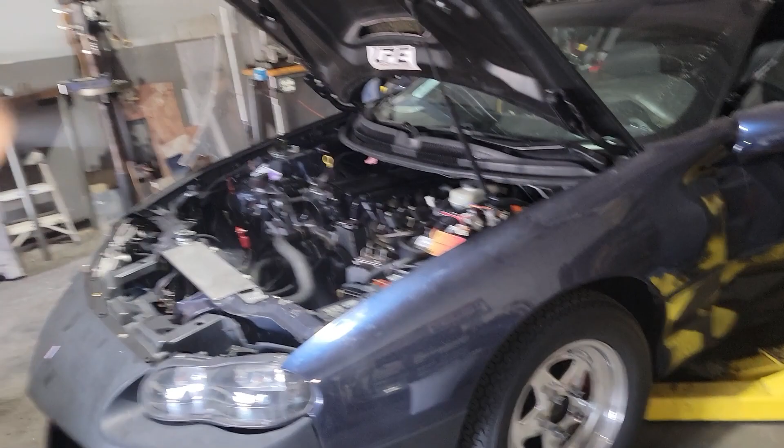Yesterday we started on Jesse's Camaro, and we got the whole heater box out. The dash vents are out. I gotta remember to cut that off.

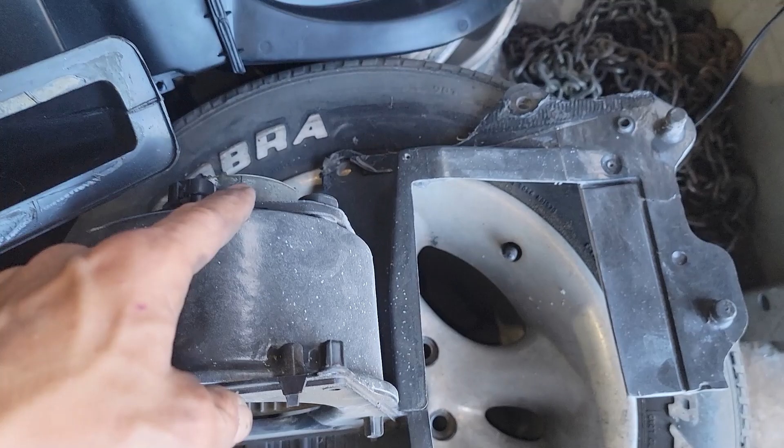So what I did today, I came in this morning, took a piece of aluminum, cut it off, then took the heater box apart - this piece here - so that I can use it as a template. A couple pieces broke, but I stuck them back together, made the template, and cut the template out of that piece of tin. You can kind of see, with a plasma cutter, kind of a rough cut.

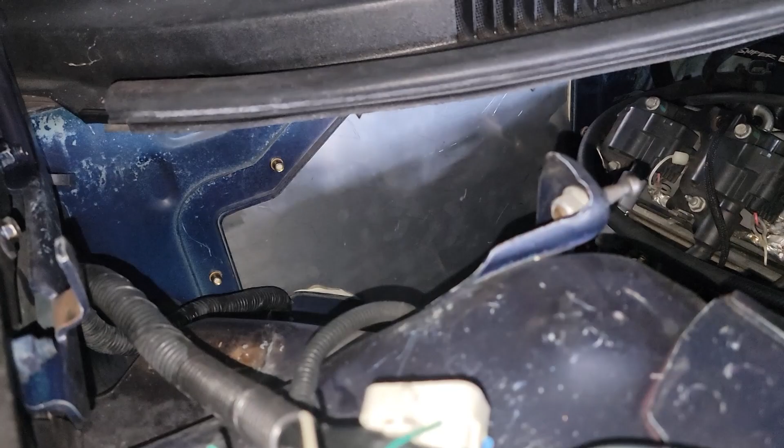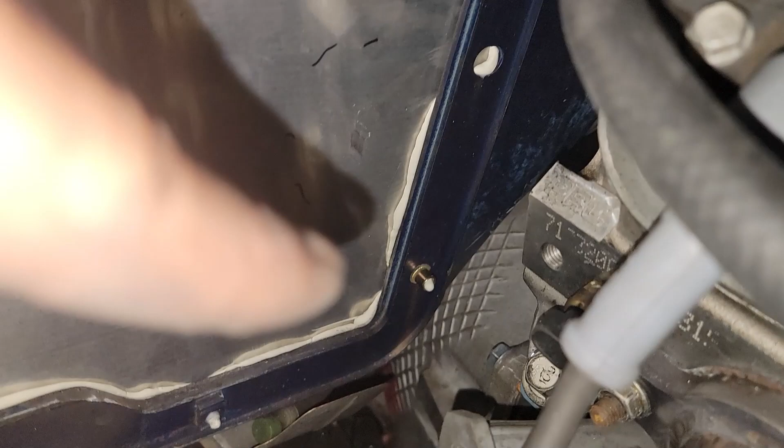Went through the firewall and did all the nutserts where the big holes were, where the bolts came from the outside of the engine bay into the box. So it was these - two up there, one over there, one down there. So all of those, I did the nutserts. The holes were friggin' perfect for the nutserts to fit.

And then the tapped holes, where the bolts came from the inside to the outside, I took a 1/4-20 tap and literally just ran it in and out. It took a few tries because it was not easy, but I got those all done.

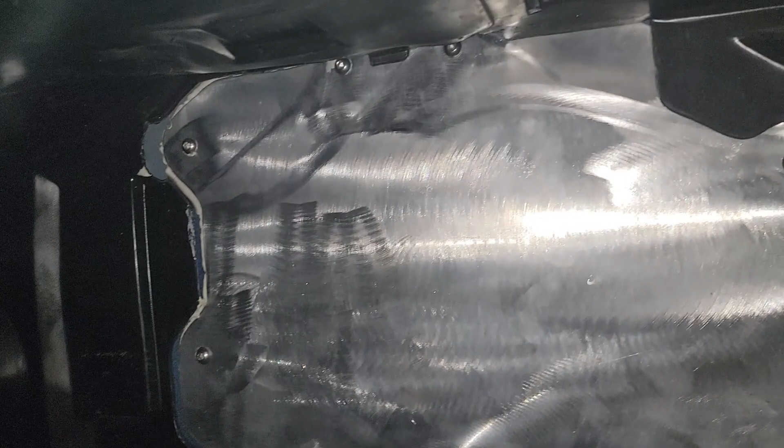Got the panel, cleaned it all up with the angle grinder, and then drilled the holes in the panel. Basically it's shaped exactly how the heater box was shaped, so it fits really good.

In and out 15 times to make sure it was right and the holes all lined up. Finally got it how I like it, and I put a bead of seam sealer on the backside of it and went ahead and screwed it all in. So it looks good. If he wants to paint it, he could paint it, or we could paint it, whatever.

So I think with that done, I believe I'm ready to start on the Terminator X. Now I have a couple different ideas that I have with it.

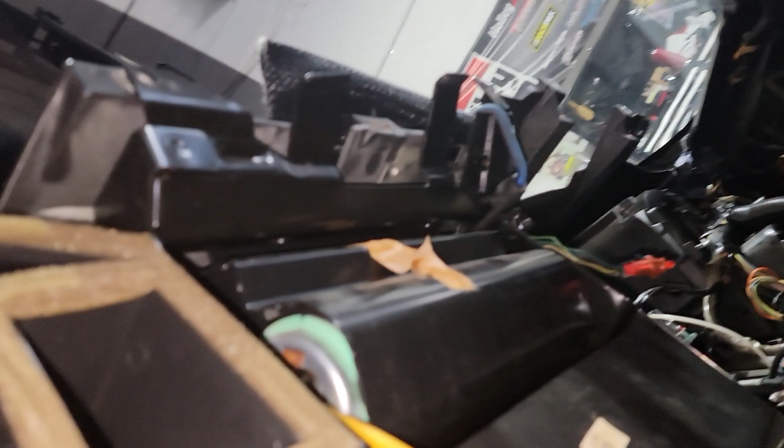Oh, I see, that's integrated into that duct. Okay, I was thinking about mounting the ECU on the back of the glove box. I just don't know, because that would probably mean I'd have to drill that hole bigger where that harness is going out to get the harness through, but I kind of have a feeling like the harness... I don't know, I guess I'm gonna have to take the harness and kind of lay it out.

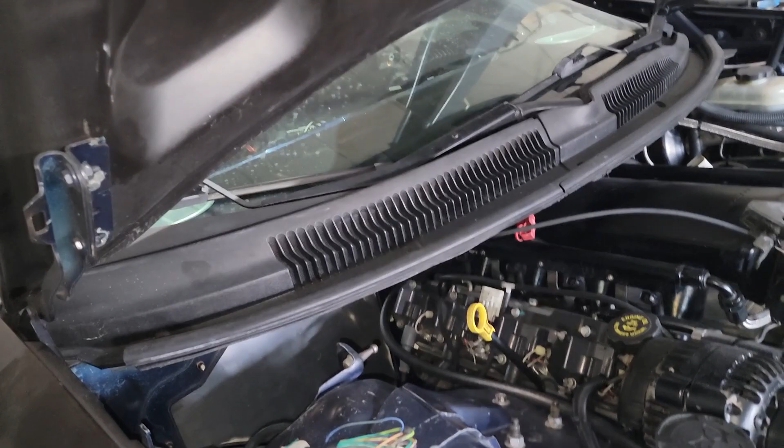But being that I'm leaving, today is my last day in the shop. We leave tomorrow morning, early in the morning. That's about as far as I'm gonna go on his car. I don't want to start doing a bunch of stuff and then forget where I left off.

I kind of want to have an easy day today. So I think what I'm gonna do is Sean's Mustang. I am going to start measuring.

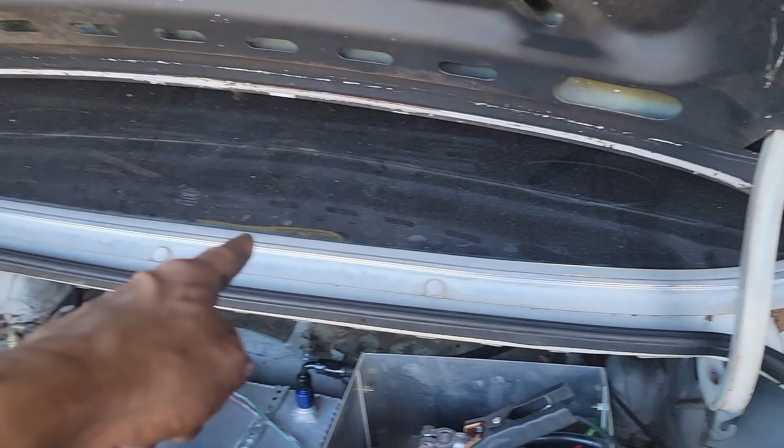So this is roll cage, mini tub, which with the mini tub, Jeff, I cut out the entire trunk floor, and then I put back in tin for the floor.

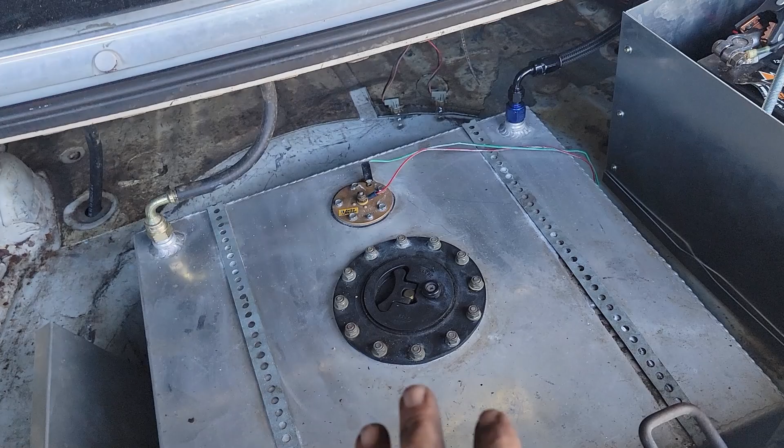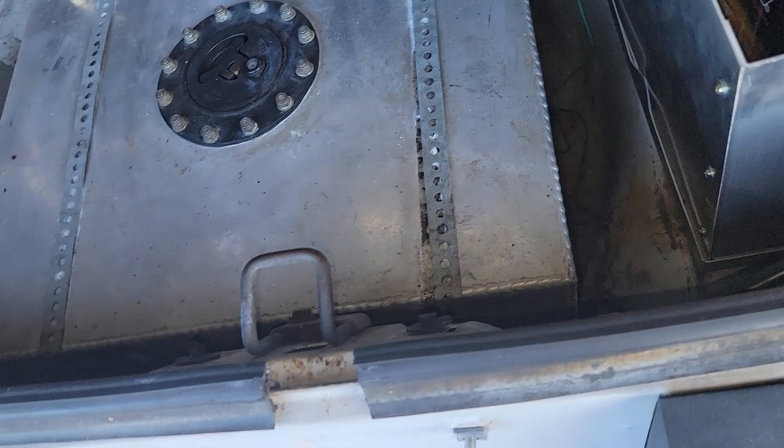On this car, I believe what I'm gonna do is kind of a lot like what we did with Chris's Capri. He doesn't have a notched - we call them notchback - but his is a hatch. So we sunk his tank down through the floor and then built the floor around his tank. I think that's probably what I'm going to end up doing, because this tank is most likely way too tall to fit in here. It'll definitely be centered more.

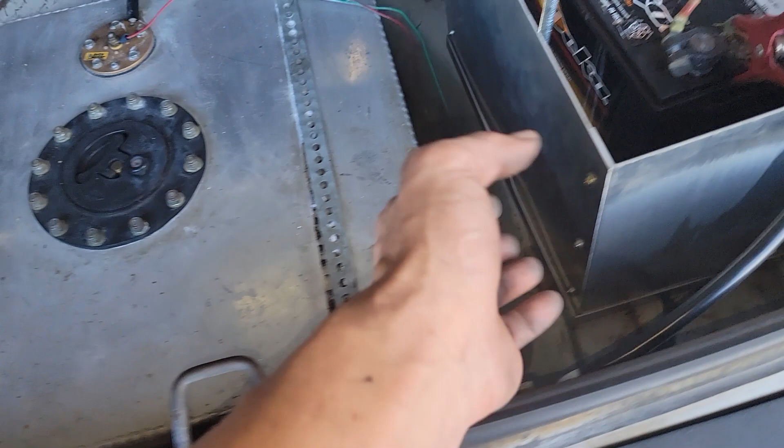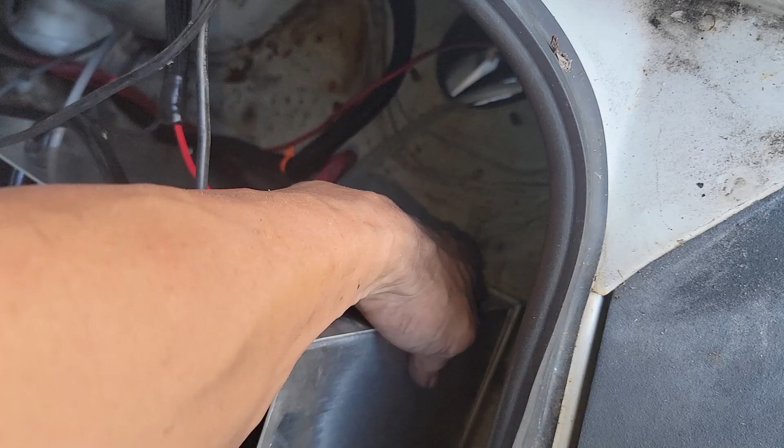And then... not sure. Oh, I see, it's just off a little bit. Yeah, put it right. Yep, there's something over there? No. Oh, there it goes, kind of. It must just be because it's mounted to the floor a little bit crooked.

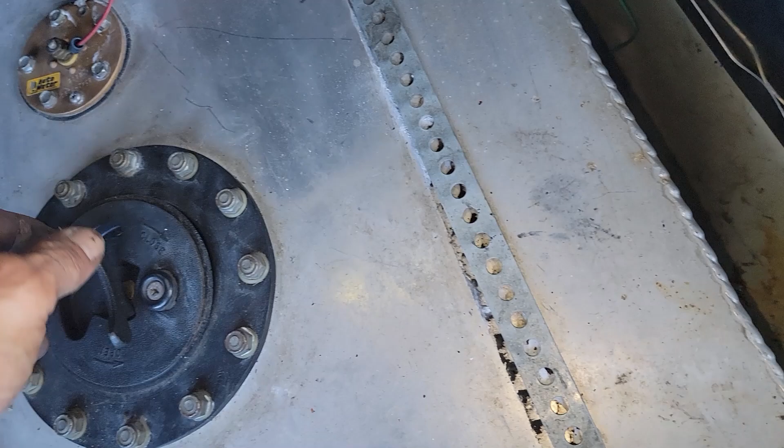So I gotta pull all this out, pull the fuel cell out. It's probably full of fuel too, isn't it? Oh boy. Oh, that's good stuff. Oh, it's not full, only half a tank. Oh, it stinks like booty hole. Yeah, so I'll have to figure that out.

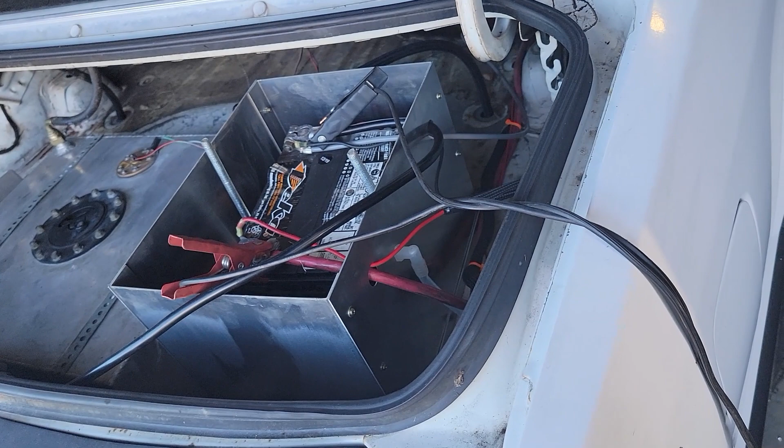I'll have to figure that out. But what I want to do for today is absolutely nothing.

No, but I'm gonna take my laptop. I have the BendTech Pro version 7X, I believe. For some reason I'm doubting everything I say today. I want to go on vacation, but let's see, let me grab it real quick.

I haven't really gotten involved in this yet. So what we can do is, see, I have roll cage templates, gives you a bunch of different style roll cages. Believe this is the one here. No, maybe it's this one.

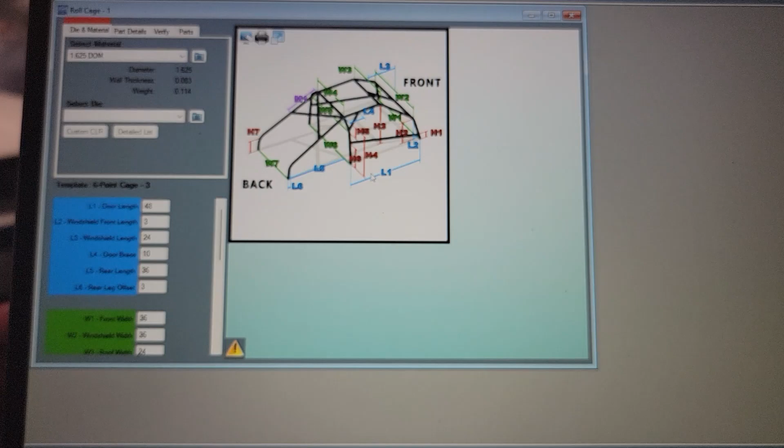Oh, sorry. No, that's not it. Alright, fucking interrupted every 5 minutes. Can't just... whatever.

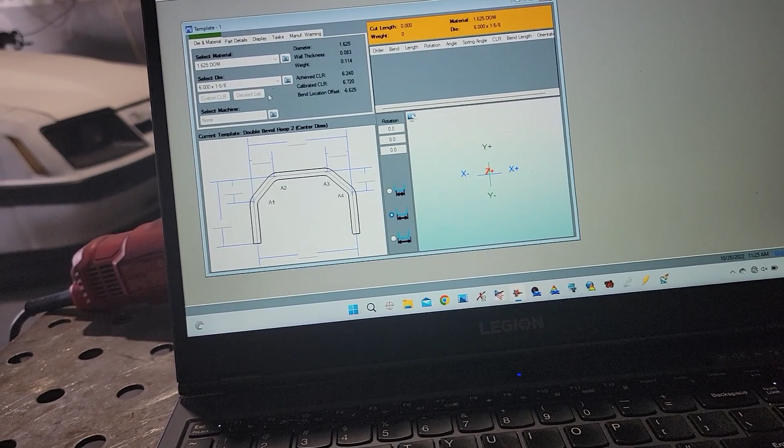So we're going to do it as an assembly, I believe. No, we have to do it as templates and then assemble it, or draw it from scratch. Like I said, I haven't really used this much.

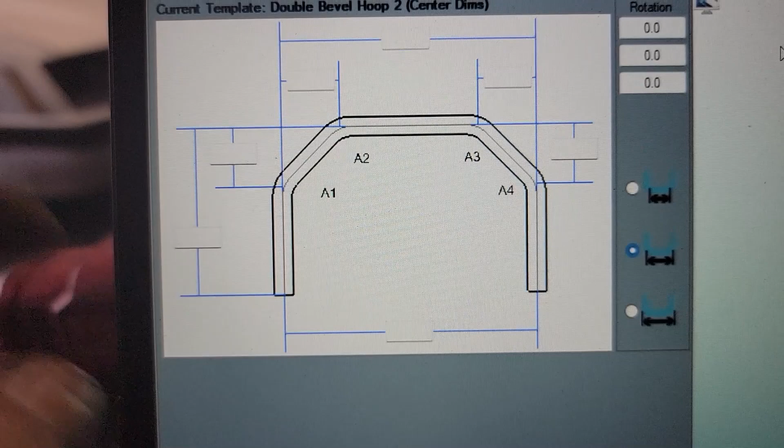So basically what you do is pick the bar and then put in your measurements, and it should tilt the bar in if you want it, because of how the body line is on the car. If you go straight down, the bar has to be moved in, harder to keep the bar tucked toward that back door jamb, if that's what you want to call it. So it'll actually sit away from that at the bottom, and then the bar will come down, there'll be a big gap between the body.

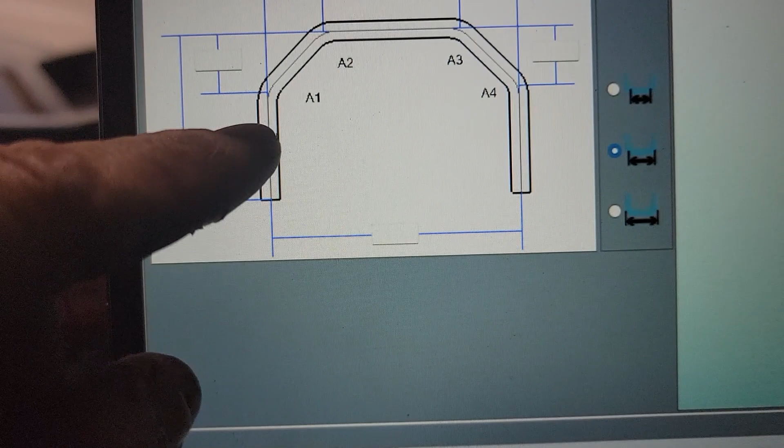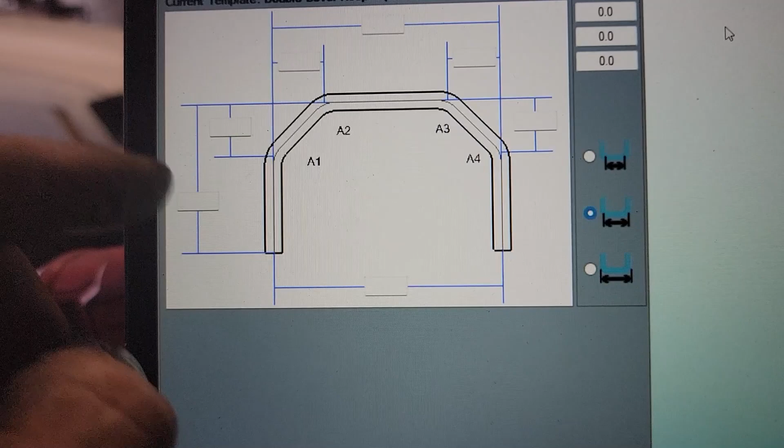So what I want to try to do is get this angle, instead of being a 45 and a 45, I want to make this angle more like maybe a 60 or something like that. So I have to measure this width, this width, this width, do all these heights and widths and see where I'm at, if this will tilt the bar in or not.

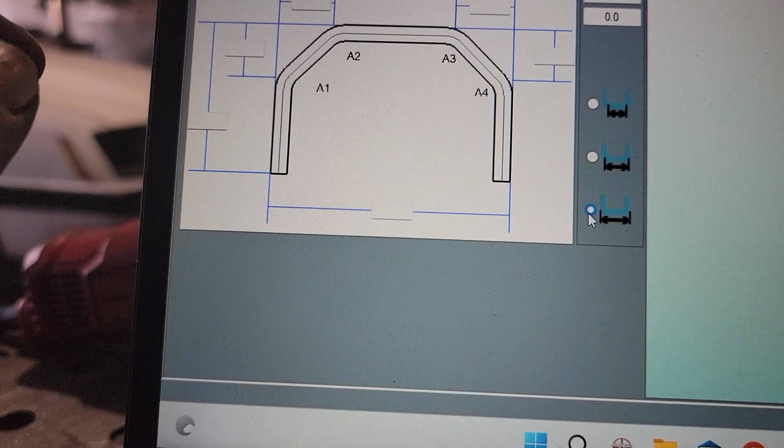It also lets you choose: do you want the inside of the bar, center to center, or the outside of the bar. I tend to measure outside to outside, seems to work a little easier because I don't have to do math or anything. So I'm gonna start measuring, see if I can put this in, and if this bar tweaks. If the bar doesn't tweak, then I'm kind of screwed, I'll just have to draw it from scratch. So I'm gonna get started.

All right, I am not one to give up, but the only way to describe it is what the fuck, because you put all the numbers into this software and it gives you your main hoop. It tells you where to put the shit, it tells you what angle to bend it. All this gravy, hoopla doopla, yay yay. And that's the first bar right there.

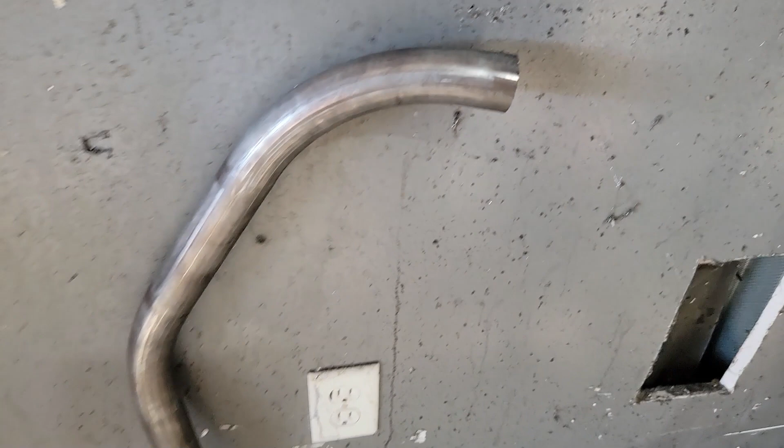So that would be the upright, the bend, and then that would be the roof bar. And it actually was sitting like this, so the angle's way, way off. Not only that, the thing is too short. But if I hold that angle pretty good, you can see the damn thing's pointing down, whereas it needs to be more like this. Having it kicked in like that is stupid.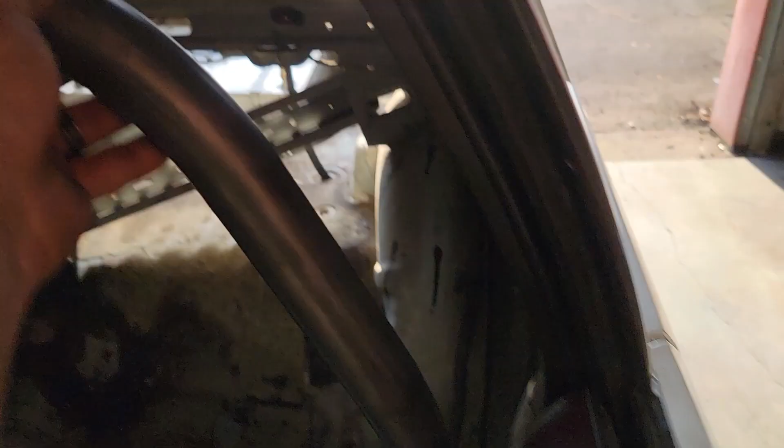But that angle's right because it would sit like something like that, so it points straight, that angle's right. That angle's too much, but it's too short. Like, what the hell? And if we go down through the floor like I want to, the dude better cut himself off at the waist. So cool, that's a waste.

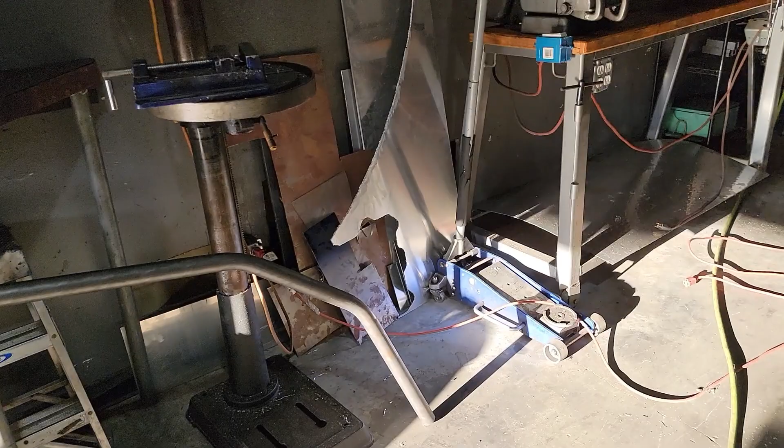Then you call, you gotta submit a support thing. They send you a patch. The patch says some kind of invalid whatever. Yep, those were the first settings. That ain't gonna work, so flip over to this side.

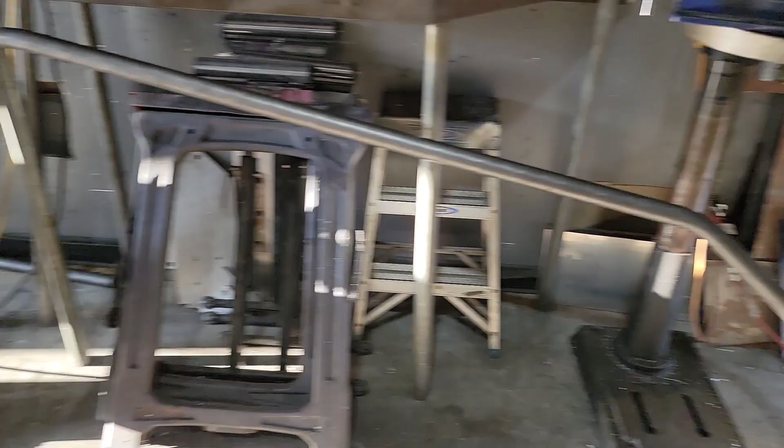Well, you're getting closer. Still wrong, still too short. So I have no idea what's going on, but I can't afford, I'll be honest, I can't afford to burn almost $1,500 in chromoly to end up with scraps that are like 10 feet tall, and then whatever that length would be, maybe 6 feet, 5 feet by the time you get done cutting it, and there's another one about 10 feet.

So the good thing is I can use this for the A-pillars, door bars, stuff like that. That's the only bright side to it. But until they figure out what's wrong with the software—because I sat and waited over 2 hours for them to email me a patch, to then sit on the phone for an hour and say the patch didn't go in or something, I don't know.

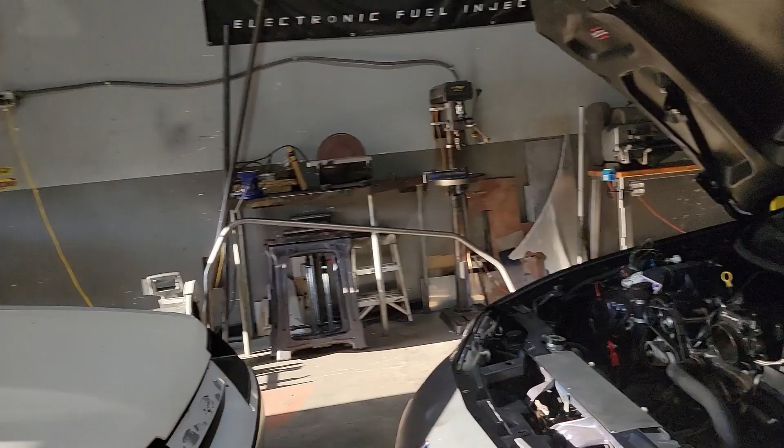You kind of expect it to work when you spend a lot of money. Honestly, with that piece of shit frame and the die, I couldn't tell you where the die is, but I bought a die. I can bend a cage, it's a little bit of work and a lot more measuring and stuff like that. But I've never wasted that much tube. I never put 6 wrong bends in tubing. I just don't understand it.

When you pay a lot of money, the bender's good, the bender works, and the bender's accurate and all that stuff, and it's doing what it's supposed to do. But when you pay a bunch of money for some software that says it's supposed to make your life so much easier, you would expect it to work, but apparently it doesn't work.

So I'm waiting for support to get back, but I'm leaving. I'm done. Because it's a bug or something, I don't know, and the thing calculated something wrong, so we changed it. Quote unquote fixed it, you're good to go. Shoved the bar in, and the first bend is like the same as the last one. Literally, it came out exactly the same as the last one.

Just as soon as you start putting the measurements on the bars, you kind of get the idea something ain't right, because your first measurement should be very close to your last measurement, other than the distance of what's called the clamping block that goes in here and pinches on the pipe, which is like 3 inches difference. But when you measure it all out and it's like 12 inches difference or 11 inches difference, you get the idea that something ain't right.

I knew it didn't seem right, and I said to the guy, no, it's not their dollar they're bending. I'm not trying to knock them or put them down, but because they're not physically here seeing what's going on and trying to work with what's going on. At the same time, it's like, dude, how many other people have this issue? But that's probably why it takes like 2 hours for them to email you back a patch.

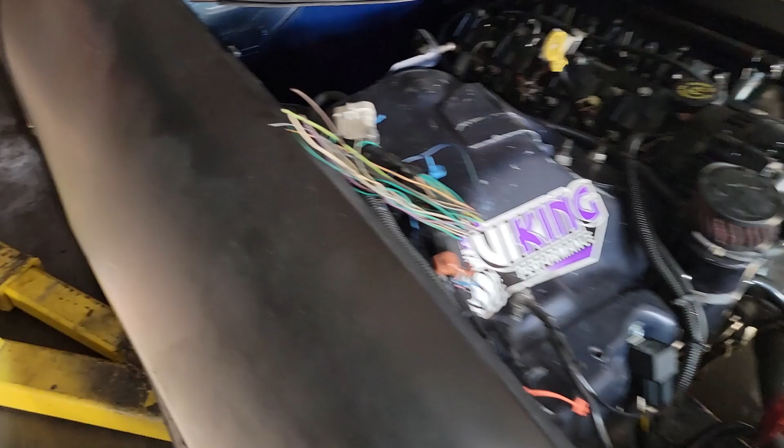It even color matched the firewall. I'm not sure if I showed that. I just painted it, I had a can of paint, so I painted it. I got the Terminator out, opened up.

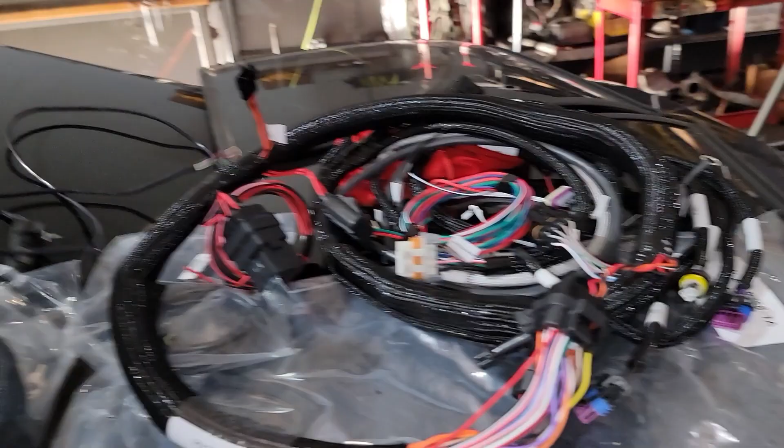We discussed a couple options we want to do with a couple of things with the USB cable to make his life a little bit simpler as far as plugging in. But I will say, Holley definitely changed their braiding.

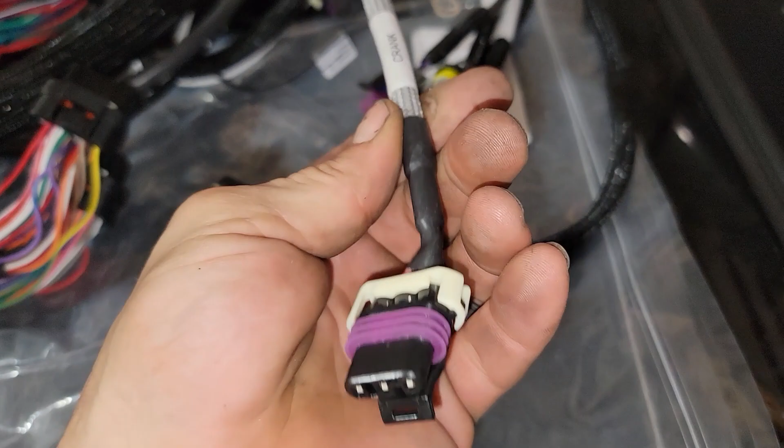It's nicer, they went to a smaller braid. It's definitely different. And then if you look at the crank sensor, that has a totally different heat shield on it, much nicer than just the foil wrapped heat shield that they were doing. It was literally like tin foil they wrapped around that wire. So that's kind of nice to see.

I haven't really laid it out yet or anything, but it just looks like the branches, the overall size of the harness is smaller. I'm not sure what they did there.

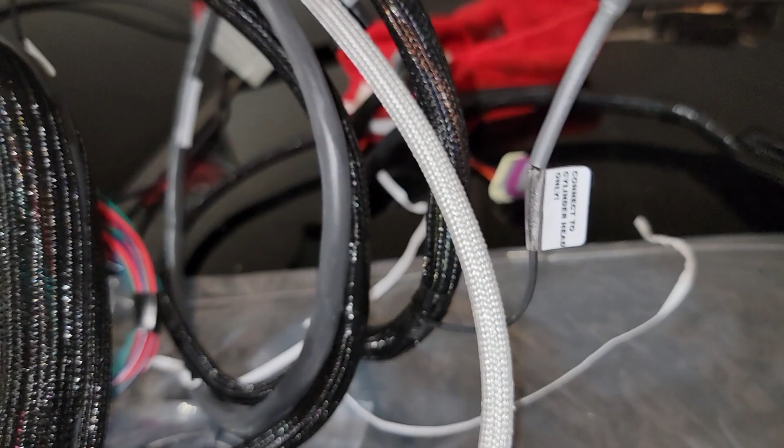Obviously this braid's a little small, she's a little pregnant, but the overall size of it is nice. It looks like where they divide it off is different too, which is kind of nice, because these were always an issue where they divided these off. Not an issue, but some setups were a little bit tricky to kind of split everything and go wherever. So I'm kind of excited to see how this one works out.

One thing I don't see... oh no, it's in there. Yeah, there's the injector harness, there's the input output, the wideband. Okay, everything's in there. Freaking me out.

I'm leaving to go on vacation. I'm out, it's like 10 days, something like that. But when I get back, I will figure out this bender. I will bend this damn cage. We'll have pretty much everything to start Jesse's car. I ordered everything even though I'm not going to be here. I have people that get the deliveries for me, so I should have pretty much everything to stick his car back together, or start sticking his car back together, building the turbo kit and stuff like that.